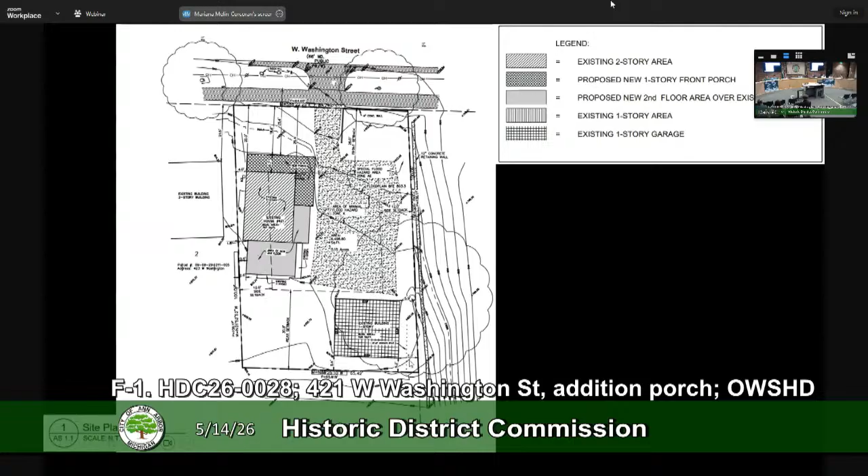And then, bear with me, there's a lot of lines, but this is the proposed addition on the first floor only. It's just this pantry at the back corner. It is inset to preserve these corners of the house.

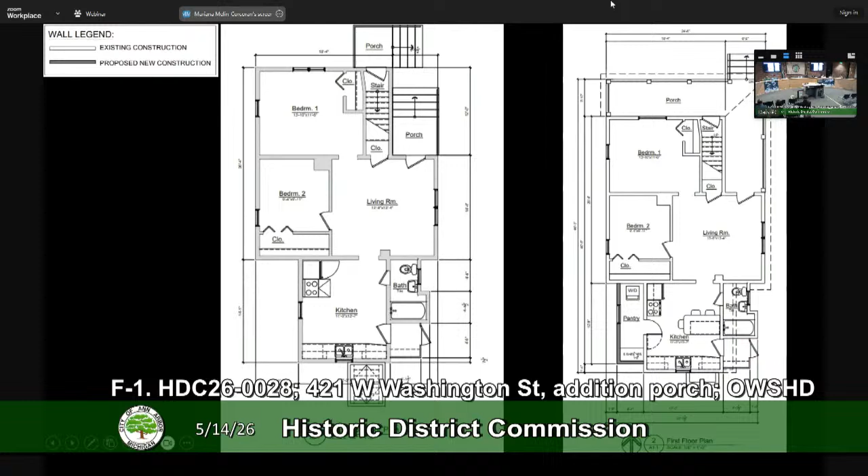And then on the second story, we have 2 separate additions. So there's this rear one that the crawl space and the pantry were built to support, over an existing 1 story. And then on this side, just a second story addition with these 2 powder bathrooms.

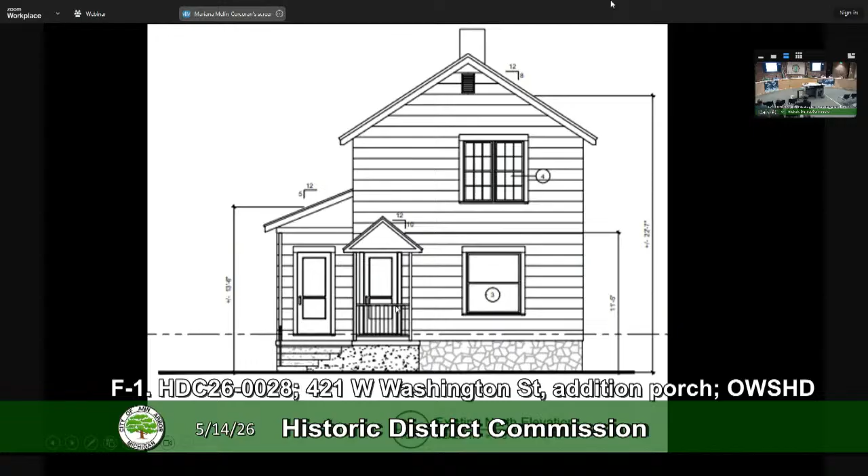So front of the house, you can see the separate porches, and then a lot of changes here. So, removing the siding. This becomes a wraparound porch, and then this is that second story only addition on the east side.

East elevation as it is shown now.

And then here you can see, so different parts, new siding or original siding. Then we have the wraparound porch. Then this second story addition only on the east side. And you can see the eave of the porch showing that it is an addition, the second story. And then same thing here, rear addition. You can see it's inset, it's lower.

I can give you some numbers in a minute when I get my notes, but a lot going on.

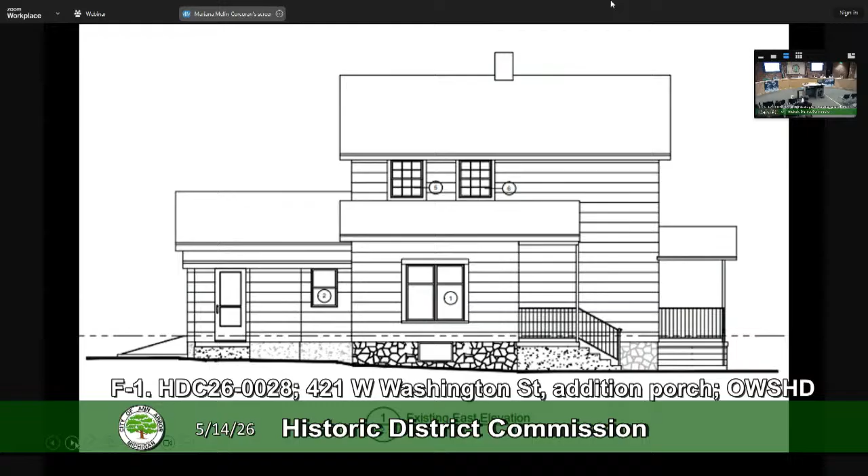Can you point out which windows are going to be the reused windows? Yeah, it's essentially extruding the windows. Let's see - these two windows that are here would come out and be in the same place, and then same thing on the rear, where this one is, on the existing plan. In this instance, both of those instances are going into...

Masses that are well differentiated, I would say. So it seems like this is a kind of a better example of doing this. But I wonder if anyone has a different take on that? No, okay.

Very good. All right, so I got to go back and just make sure that we've got everything. So I guess just the rear addition in general - this is a little tricky because we talked about as proposed the porch, also as proposed the rear addition. If the side addition isn't done, then the rear addition is just hanging off the side of the building with an opening in it. I mean, obviously they could - as proposed, it just is making it a little tricky.

I guess you could see it best in the floor plan probably, because it's kind of hard to see otherwise. But if you look at the second floor plan, right there in the corner where the bath meets bedroom 2, if the bath isn't built, you'll see the closet - the back of the closet there'll be a few inches of just open. So it is a little hard to have these conversations separately, but for the sake of the motion, let's just continue.

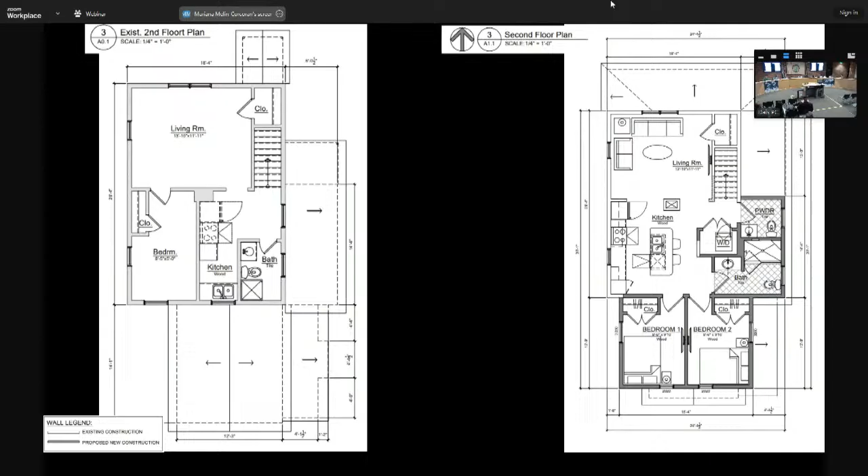And I guess the question is the rear addition - it's following the standards on the west side. On the east side, it's not, but like we heard from the applicant, it is about as small as you'd really want to make 2 bedrooms. So what are we thinking with the rear addition here?

It also is a bit - that east wall, I'll add one more comment - that it kind of overhangs what's below it in a way. So on the west side, on the left side where we're looking, I believe it's just following the new addition all the way down. On the right side, east side, it's an existing condition, and maybe we should look at the rear elevation for this comment, but it looks like it's overhanging a bit.

So there is some - okay, it's not overhanging because it completely encapsulates that one story existing, and it lets a little bit of that one story existing come out of it so that you can read it.

Let's just say it's not the perfect application, but you could tell a lot of thought went into it. What do you guys think? What are the thoughts here? Let's begin - where do we begin? The corner. What don't you like? What do you like?

Yeah, I think this is a thinker. It's a good application - all the information's there. It'd be great if there were some 3D renderings, but we have all the information we need here.

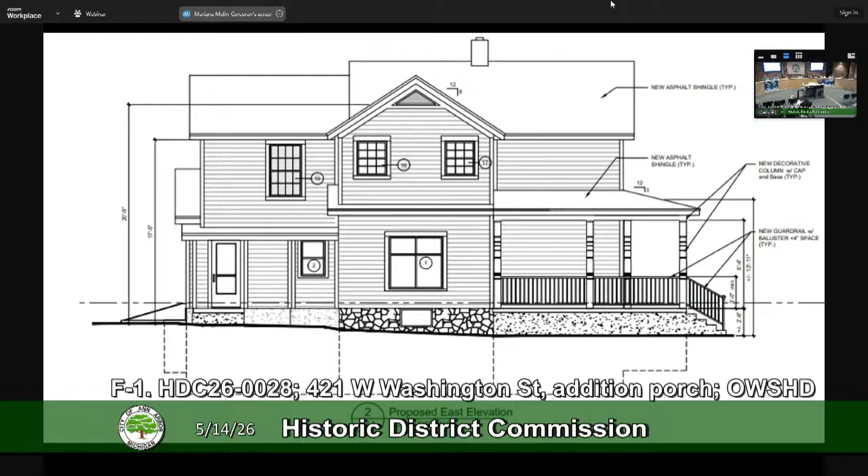Can we see the south elevation? There's just so many roof lines that it helps to keep going back and forth because your eye gets lost. So it looks like the east wall comes about halfway, or not quite halfway, over that porch, is what I'm seeing. It's not right up to the front of the porch, which you don't really know because that roof is so low slope. But it's a good one-third back, or two-thirds back to be generous. Yeah, kind of like a little hat.

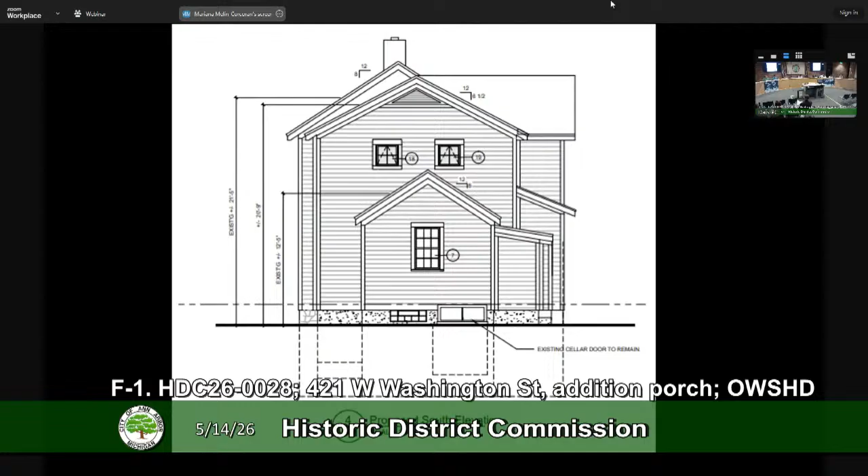All right, does anyone else want to chime in with a comment? I have two things.

One is, I do feel like we should talk about the East addition a little bit before voting, because if we were to approve this one and not the East, I do think there's some weird design things that would have to be resolved on the rear addition. There's already a lot of different roof lines and a lot of stuff going on, but there would be some areas that would not work without it.

One other minor thing we should talk about is, since we don't know what the original siding is, making sure that we have a note that if either of the additions are approved, the new siding is a different size than the original, because we want to distinguish the original siding from new. It'll also be a different material, so that also is just a differentiator enough.

And I will ask staff now, because Commissioner Carter brought up a great point here. I've sort of come to the conclusion that, just like you have, that it's really hard, because of that east wall, and now we learned the porch too, to separate that other part. It seems integral to the project.

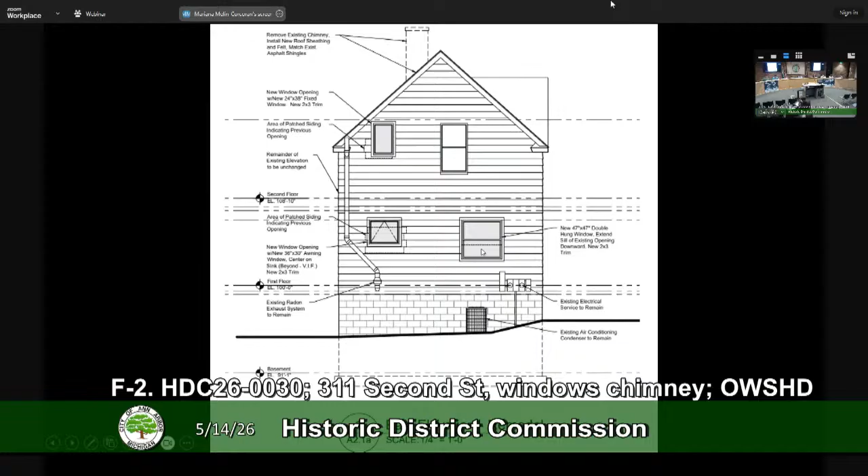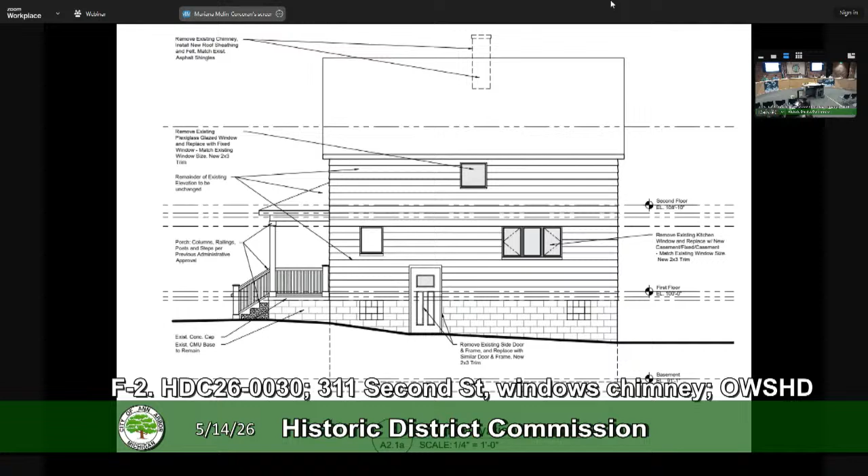So you have a new fixed window here. I believe this is an awning here, and then a double hung here. Same width, a little bit longer. And then on this side, again, non-original fixed window here, and then these 2 casements and a fixed. Proposed to be removed and replaced in the same opening, same sizes with new trim. Nothing changing on the north elevation.

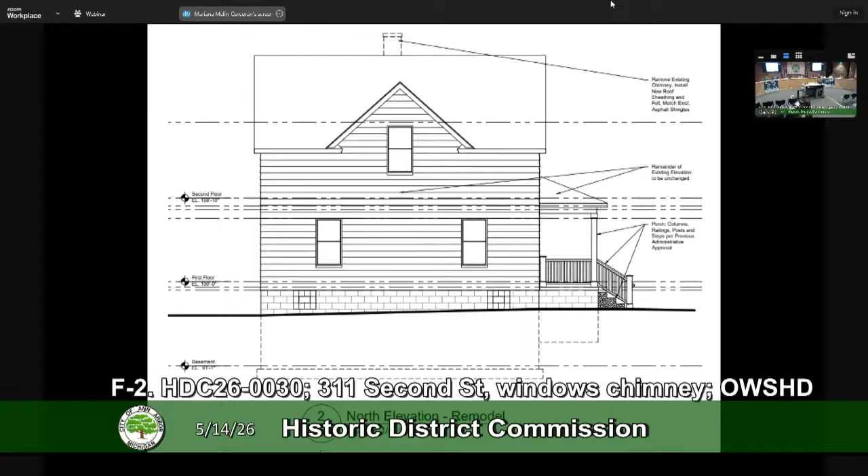Oh, I should have mentioned, there will be some changes to the porch. They are shown on the drawings, but they can be staff approved, so they're going through a separate staff approval process for the porch. You do see some changes to that, but that is not a part of this application. So you can see that here, existing, and then some changes with the remodel, but that is not the discussion tonight. Some photos from the applicant.

All right, I did not read this one, so I will read it. From the Secretary of the Interior Standards: a property will be used as it was historically, or be given a new use that requires minimal change to its distinctive materials, features, spaces, and spatial relationships.

I already read 2, 9, and 10. For building site, from the guidelines, it's recommended to identify, retain, and preserve buildings and their features, as well as features of the site that are important in defining historic character. It's not recommended to remove or radically change buildings and their features that are important in defining historic character.

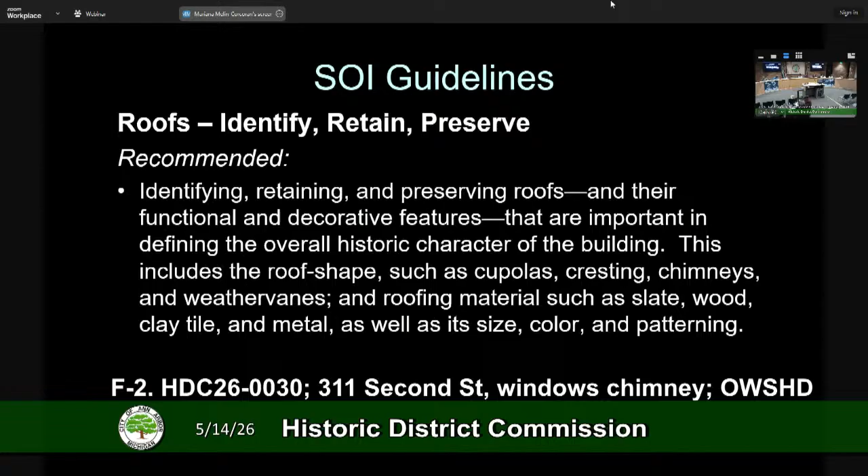For roofs, it is recommended to identify, retain, and preserve roofs and their functional and decorative features that are important in defining the overall historic character of the building. This includes roof shape and things such as chimneys. It's not recommended to radically change, damage, or destroy roofs which are important in defining the overall character of a building.

Also recommended, for windows: it's recommended to design and install additional windows on the rear or other non-character-defining elevations if required by the new use. The design should be compatible with the overall design of the building, but should not duplicate the fenestration pattern and detailing of character-defining elevations.

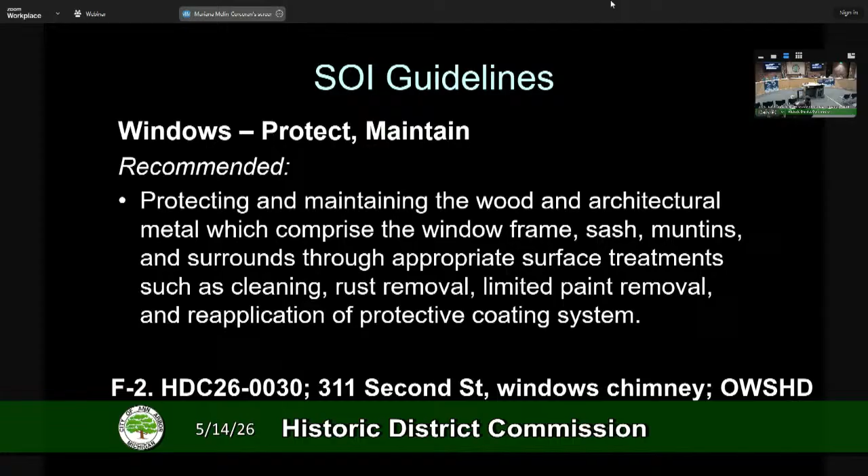Recommended to protect and maintain wood and architectural metal, which comprise the window frame, sash, muntins, and surrounds, through appropriate treatments. Not recommended to introduce a new design that is not compatible with the historic character.

From the Ann Arbor Historic District Design Guidelines: it is not appropriate to remove or alter historic roof features such as chimneys, dormers, and others. For windows, it is appropriate to retain and maintain windows in good condition. It is not appropriate to change the number, location, size, or glazing pattern of windows by cutting new openings or installing replacement sash which does not fit the historic opening.

For doors, it is appropriate to replace a missing original or non-original door with a design that matches the original doors remaining on the house, or a compatible new design that fits the style and period of the house and the existing opening. Okay, I'll go back to a photo. I have just a few more things to say.

So we talked about removing and replacing four windows on this south elevation. That's the one second-story window, and then this trio of windows here, replaced in the same size opening. The windows are assumed to be non-original, and the top one definitely is non-original.

Also, the fifth window on the rear—I don't know if I'll be able to find that easily—but that's a fixed window we saw that will be replaced with the same width, and then it will be a double-hung, a little bit longer. And then there are two new window openings on the rear, where there were formerly openings.

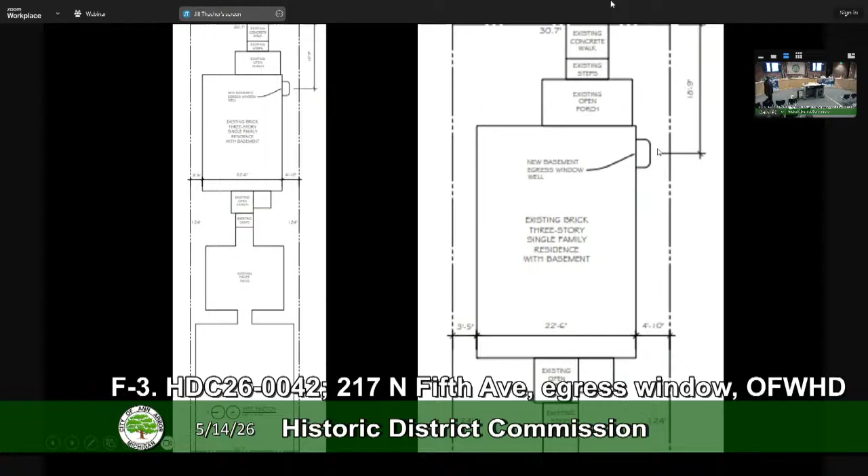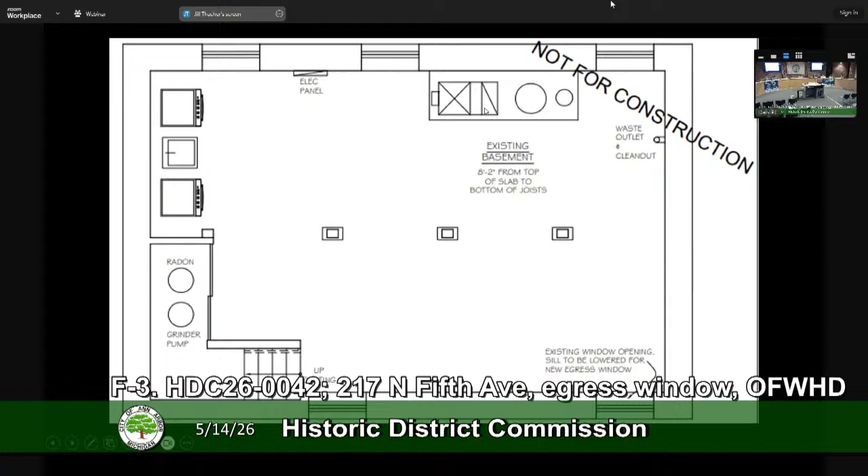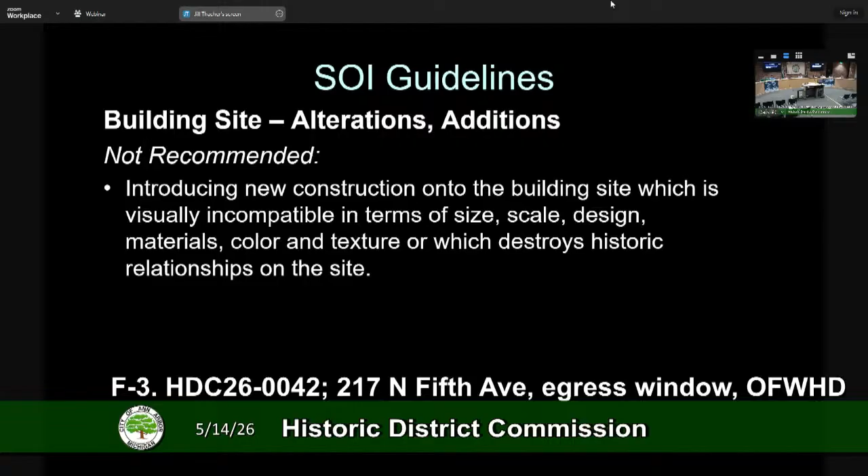Mariana has already read standards 1, 9, and 10 to you. From the Secretary of the Interior's guidelines for building site, it's recommended to design new exterior additions or adjacent new construction which is compatible with the historic character of the site, which preserves the relationship between the building, landscape features, and open space. It's not recommended to introduce new construction which is visually incompatible in terms of size, scale, design, materials, color, and texture, or which destroys historic relationships on the site.

For windows, it's recommended to design and install additional windows on rear or non-character defining elevations if required by the new use. Such design should be compatible with the overall design of the building, but not duplicate the fenestration pattern and detailing of a character defining elevation. Not recommended is introducing a new design that is not compatible with the historic character of the building.

For health and safety guidelines, it's not recommended to alter, damage, or destroy character-defining features and finishes while making modifications to a building to comply with safety codes. And from the Ann Arbor Historic District Design Guidelines, it is appropriate to comply with barrier-free and safety codes in a manner that ensures the preservation of character-defining features.

So I think that this is the first time that you've heard me actually endorse a front corner egress window on a house, but exceptions are made, and that's why they're guidelines and not rules. I think that this one would be appropriate.

Let's see, let me see if I missed anything in the staff report. I did put a condition on the suggested motion that the width and horizontal depth of the egress well are the minimum required to span the width of the wall opening while meeting code requirements. So basically the smallest well and window that you can put in to meet egress requirements. That is all.

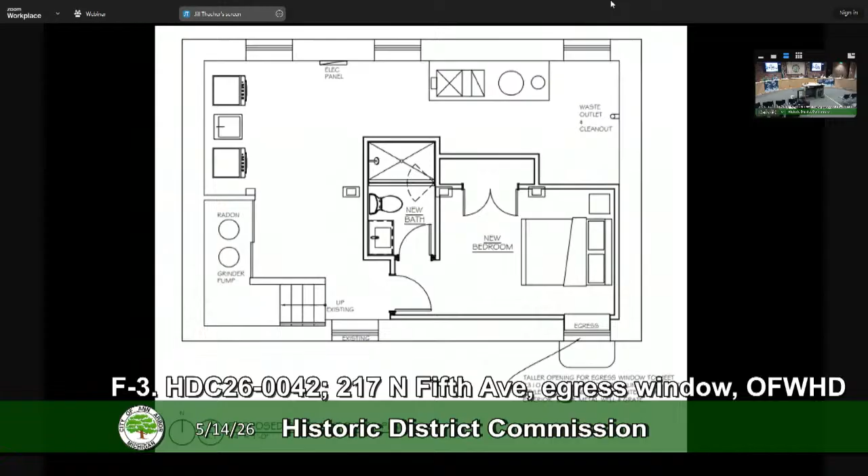Thank you very much, Ms. Thatcher. So now we'll have the review committee report, please. There's nothing to add. This was very straightforward. You can see it there, the picture says it all. Yep, I would agree, it's a front third egress window. Very good.

Thank you both. Now we'll get the applicant presentation, please. Is the applicant here? Great. Please state your name and address for the record, and please give us your report. Sarah and Ryan Ball, 217 North 5th. We are the owners and residents. I think Jill covered everything. We just had two things to address that came out of the staff report: the existing opening will stay the same width, it will just be taller, meeting the minimum requirements for code, and the well itself will be black metal, 36 inches wide and deep.

Very good, thank you for that. Does anyone have any questions for the applicants? Great, thank you.

At this point, the public hearing will be open for this item, 217 North Fifth Ave. This is an opportunity for persons to speak for up to 3 minutes about this application. No one is approaching the podium, we do not have anyone online. So we can close the public hearing and move on to ask a commissioner if they'd like to make a motion on this item.

I move that the commission issue a certificate of appropriateness for the application at 217 North Fifth Ave, a contributing property in the Old Fourth Ward Historic District, to construct a new egress window and well on the south elevation near the front of the house, on the following condition: that the width and horizontal depth of the egress well are the minimum required to span the width of the wall opening while meeting code requirements.

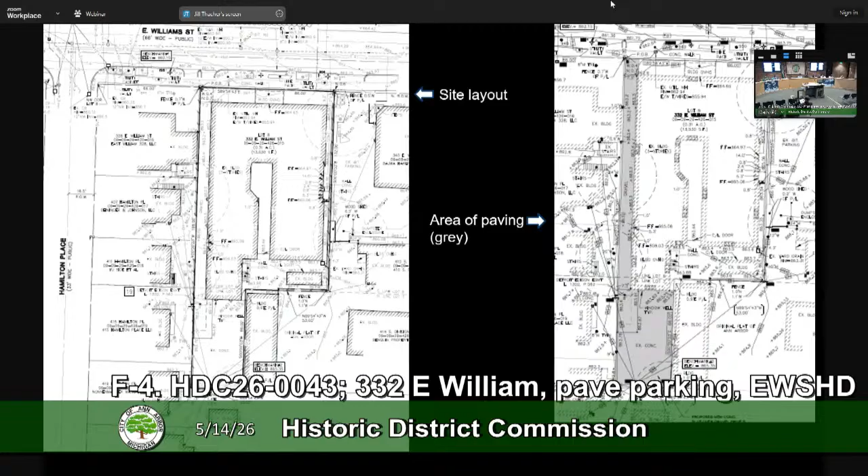So it's around 70% paved now. That's a guess. The parking area is 33 by 66 feet.

And really, this should not negatively affect the historic structure or surrounding neighborhood. Staff is recommending approval. The Secretary of the Interior standards 1, 2, 5, 9, and 10 have all been read to you already.

Just a few guidelines. It's recommended for the district or neighborhood setting to identify, retain, and preserve building and landscape features which are important in defining the historic character of the setting.

Not recommended is introducing new construction that's visually incompatible or that destroys historic relationships. Also not recommended is removing and radically changing features of the setting which are important in defining the historic character.

There are examples of houses, more prominently, with dirt driveways, or especially two-track driveways where the two tracks are paved, where it might be more important to keep that historic feature, but I don't see it in this setting.

And for paved areas, from the Ann Arbor Historic District Design Guidelines, it's appropriate to install new parking areas which are compatible with the scale, proportion of yard area, and characteristics of the historic district behind buildings. These shall be reviewed on a case-by-case basis, which is what you are all doing now.

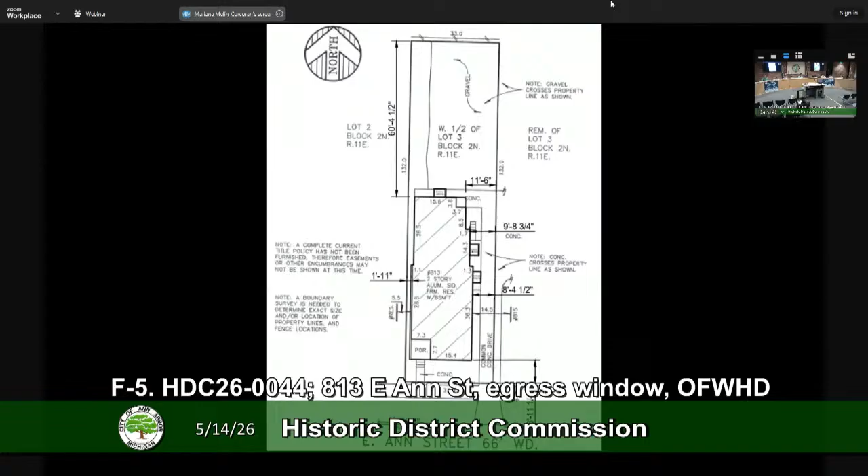You can see all those windows—eventually some of those back ones will be egress per the staff approval. And then here's the site plan. We're looking about right here. You can see the wells that have already been approved are outlined here, but the one we're looking at is right here.

So you can see a floor plan. This is the one we're looking at. This is the existing basement, and then proposed, you can see the well. It is to accommodate a 6th bedroom, which is the maximum allowed by zoning code. It has 2 units, house 1 and house 2. Having this extra basement egress window would add a 6th bedroom to the first unit, house 1.

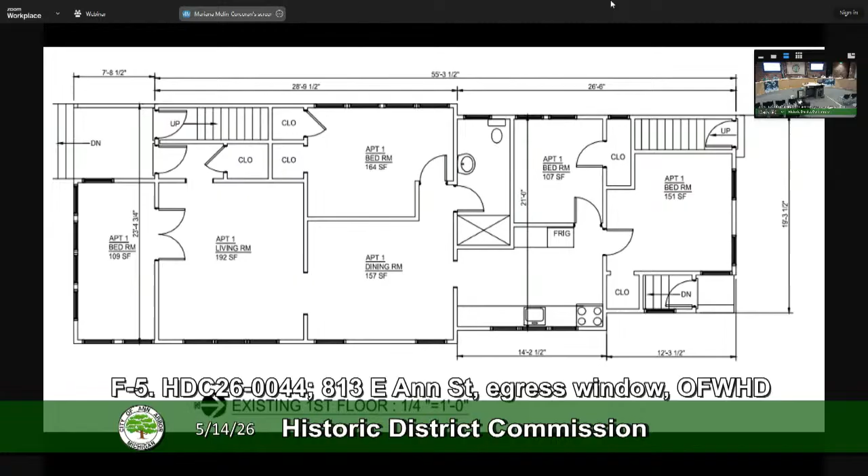They are doing some interior work on the upper floor, so you can see some new walls moving around, but nothing changing on the exterior.

Then you can see the 2nd story, and then elevation, existing—well, I guess not necessarily existing, east elevation—and then this is the window that would be, again, no window there, but new egress.

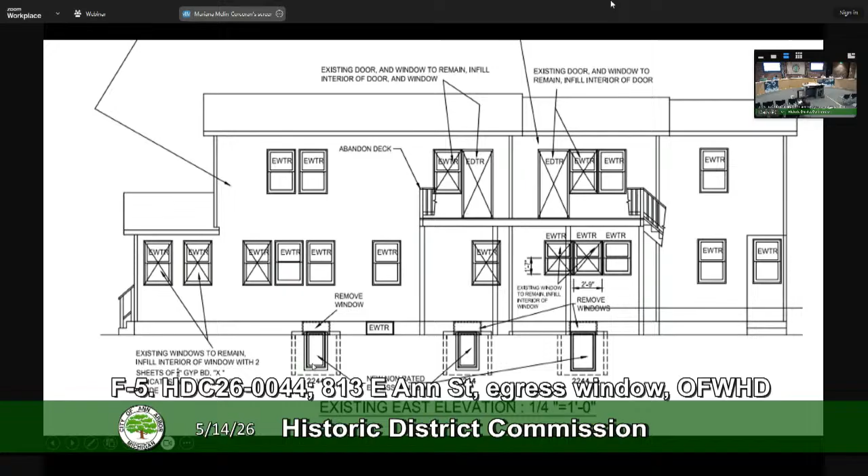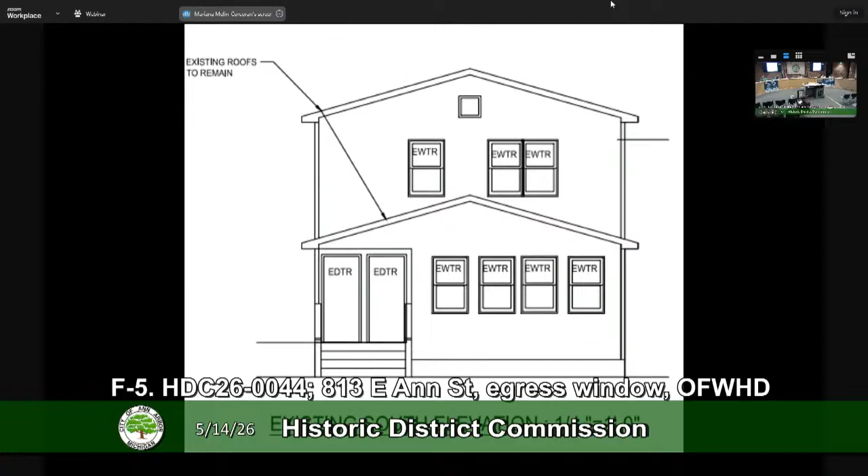Front of the house. Back of the house, this is one of the egress wells that has already been approved. And then you can see where they would be along this side.

From the Secretary of the Interior: it is recommended to design exterior additions or adjacent new construction that is compatible with the historic character of the site. Recommended to identify, retain, and preserve buildings and their features that define overall historic character. Not recommended to introduce new construction onto the site that is visually incompatible or destroys historic relationships. Not recommended to remove or radically change buildings and their features that are important in defining overall historic character.

For windows, it is recommended to design and install additional windows on the rear or other non-character-defining elevations if required by a new use. Also recommended to protect and maintain wood and architectural metal which comprise the window. Not recommended to introduce a new design that is not compatible with the historic character.